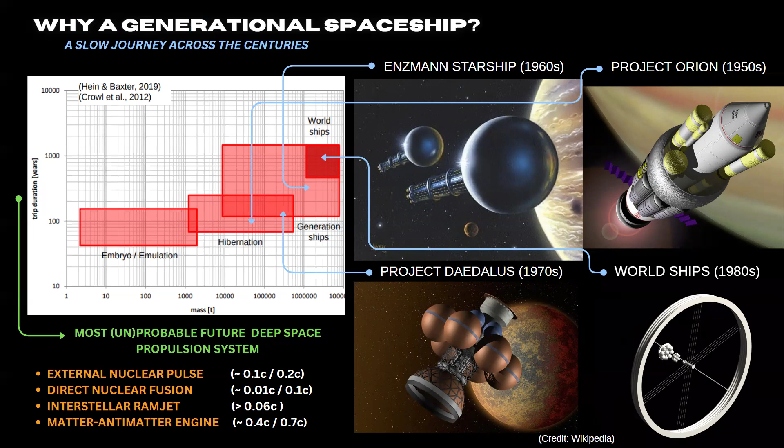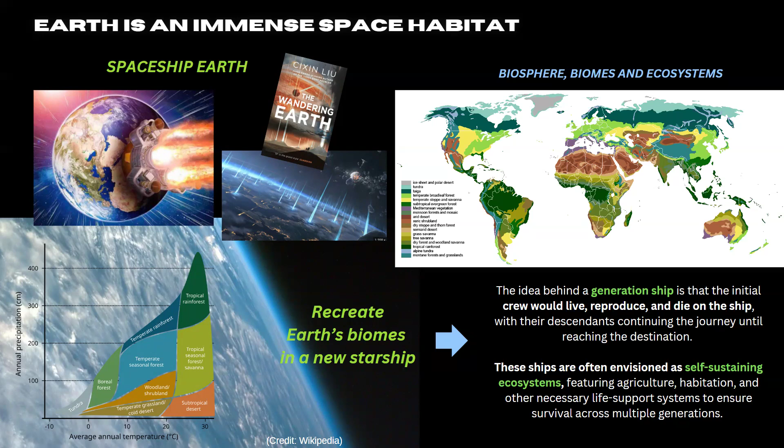The main idea is that we have to reproduce a second biosphere, like the one on Earth, a self-sustaining ecosystem that includes not only agriculture for food production, but also all the biomes of Earth's biosphere, in order to keep the ecosystem balanced and create this heritage of Earth's biosphere that will settle a new stellar system.

These objectives have already been achieved by Biosphere 2, a research facility based in Arizona, during the 80s, that recreated a closed artificial self-sustaining ecosystem for a small crew of 8 people.

But the real challenge is also to recreate a technosphere. What do I mean? Recreate a complete circular life cycle for all the resources, materials, equipment, and machines that have to be brought on the spaceship, because the spaceship will set out for a century-long voyage, and everything has to be packed, with nobody providing any kind of refurbishment to the spaceship. So everything has to be completely closed-loop and stocked in advance.

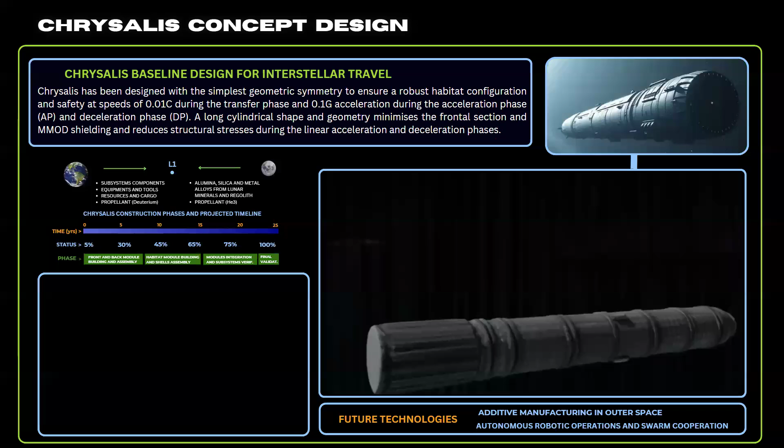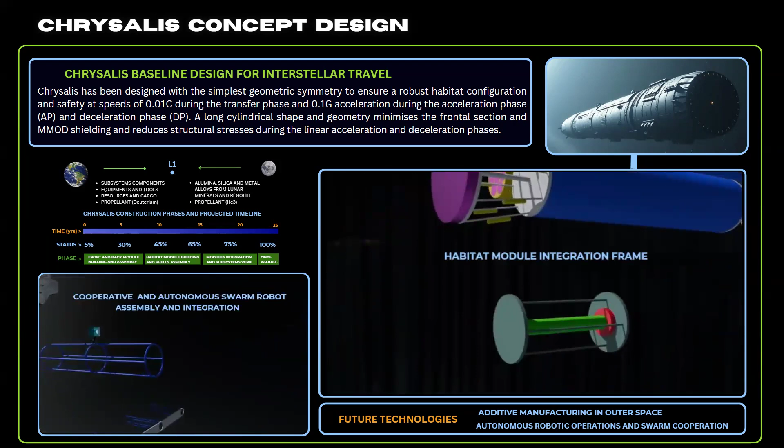This is the concept design of our spaceship, named Chrysalis. Basically, it's a very long cylinder of different modules that will be built at the Lagrange point L1 between Earth and Moon, just to exploit the resources and equipment from Earth, but also the resources from the Moon, because the Moon's regolith is rich in helium-3, which can be used as a propellant for the direct nuclear fusion propulsion system.

This is the configuration of our spaceship and its different mission phases. Basically, there is an acceleration module, a back module for the acceleration phase, and a front module for the deceleration phase.

During all the voyage, the inhabitants will be hosted in the habitat module, which is the small green rectangle. So most of the bulk mass of the spaceship will be just propellant, and the total mass will be around 2 billion tons for a length of about 58 kilometers.

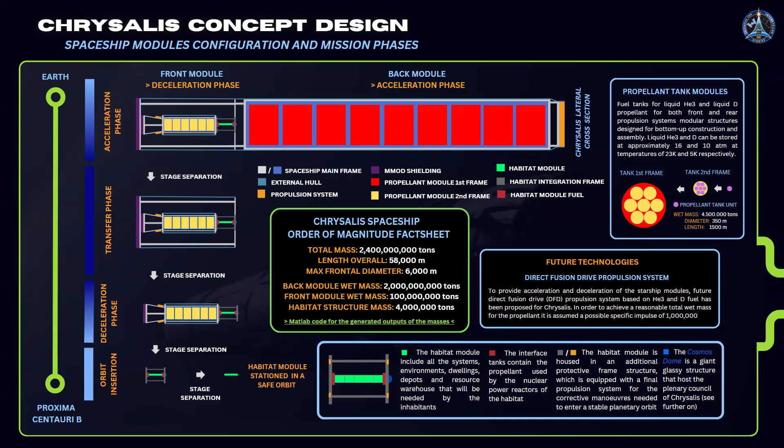If compared with science fiction literature spaceships, this Chrysalis spaceship belongs to the huge category of spaceships.

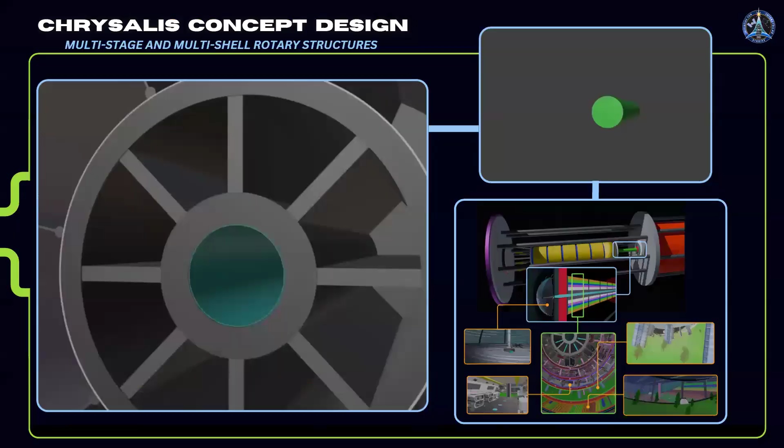What I want to highlight here is that in science-based spaceships, not science fiction, the habitat is a very small part of the entire spaceship, because the bulk of the volume is basically propellant for the acceleration of the long voyage. The habitat module is composed of 5 stages of different subshells, all nested inside and rotating at different RPM in order to provide 1g of gravity for the habitat environment.

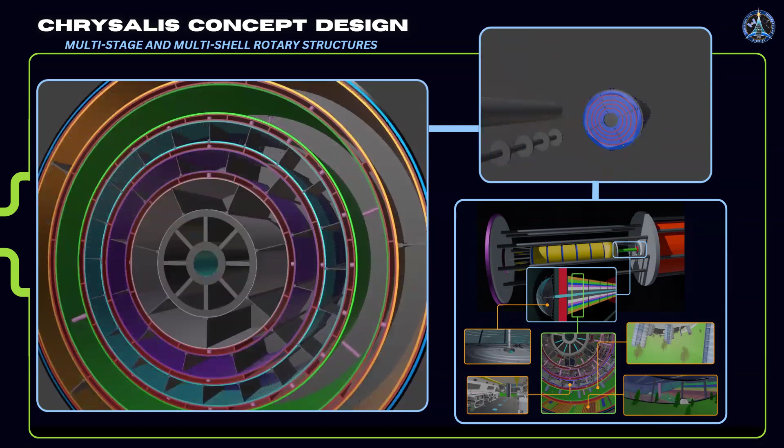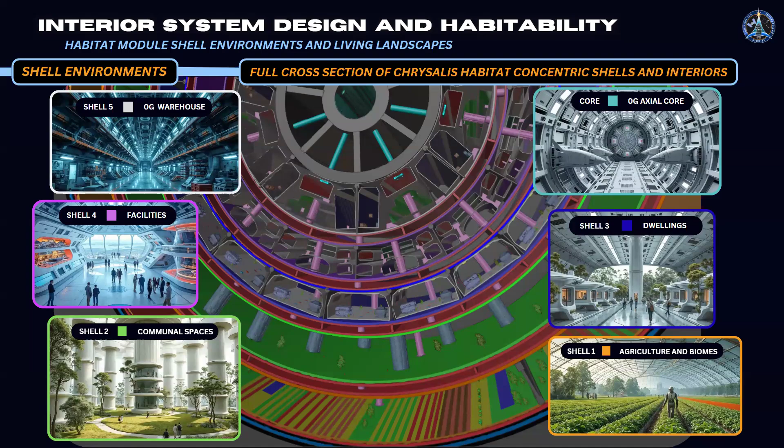Each shell hosts a precise habitat environment featuring agriculture and biomes, communal spaces for the population, dwelling areas, industrial facilities, and a zero gravity warehouse that functions as a depot for all materials and resources, plus a central access core that links all the stages and is also used to exit the habitat module during in-orbit insertion into a new planetary system.

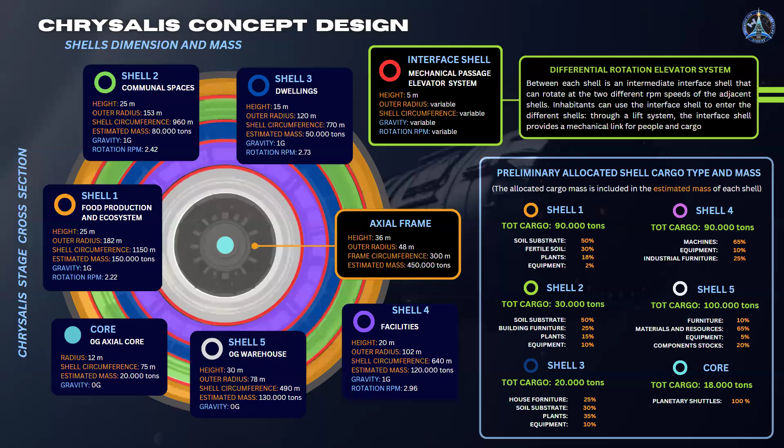The first shell is the agriculture and biome shell, which includes different biomes from Earth, like tropical forest, boreal forest, wetlands, and dry scrub, in order to preserve the heritage biodiversity of the biosphere. Each biome will be confined and insulated from the others in order to provide specific light, temperature, and humidity.

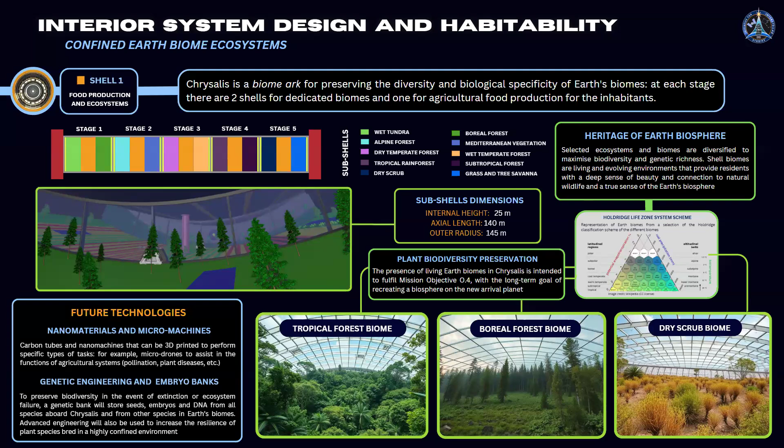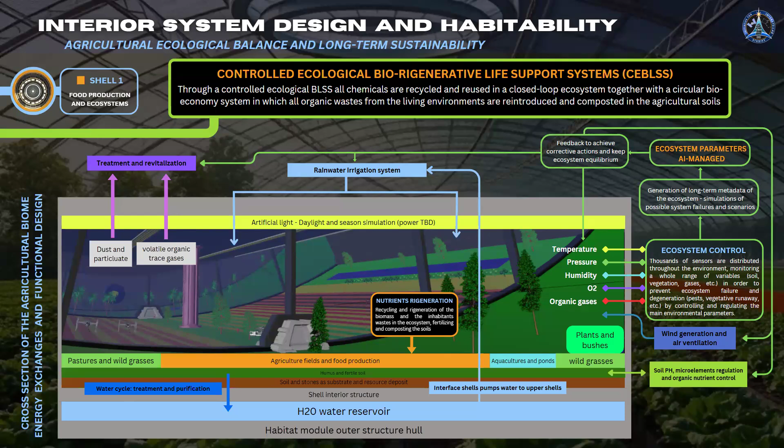The big challenge is to create a controlled ecological bioregenerative life support system, because we need to create oxygen, recycle carbon dioxide and all the other chemicals, regenerate the water, and also recycle organic wastes for the soils in order to keep fertility and generate food. It's a well-balanced closed loop ecosystem that has to be included to keep a long-term balance of the biology inside the spaceships.

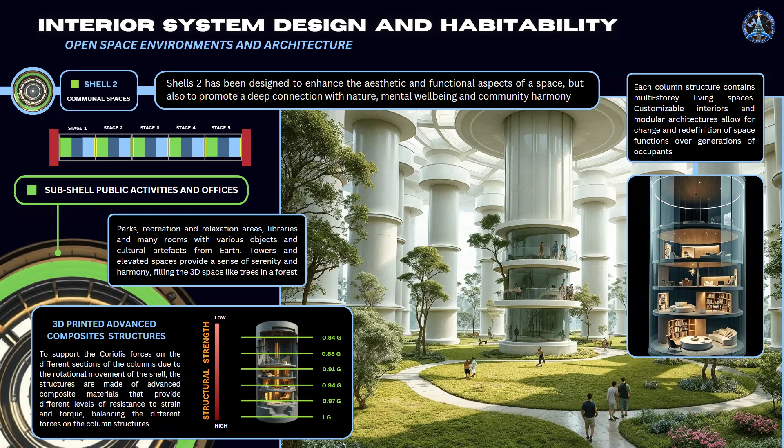There is the communal space shell, basically an open space environment structured with habitative columns where all the services like university, hospital, and so on are included. It's interesting how the perspective of a person inside these shells is not a plain horizon - because we're inside a cylindrical structure, the environment will be quite curved and the perception a little weird. All structures inside will be customizable and 3D printed through advanced printing materials.

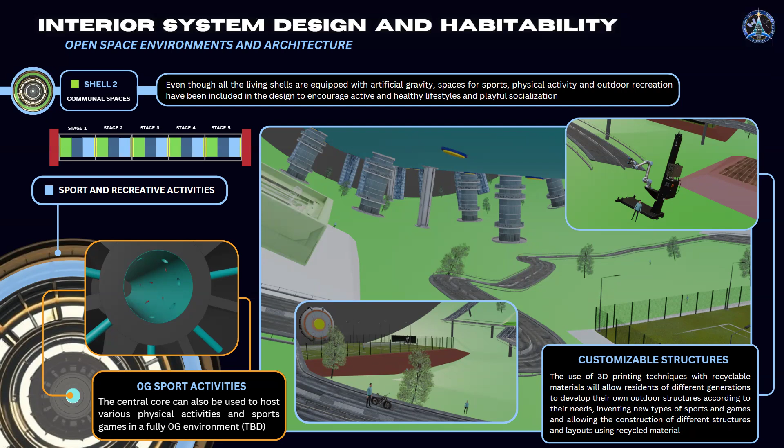We have a dwelling area where all the houses for individuals will be hosted in order to have private spaces, divided into different sectors, separated by parks and gardens to provide a relaxing and natural environment. The houses and interiors will be built with advanced composite materials and multi-layer insulation for secondary structures.

A very important shell is the industrial facility shell, which will include all the machinery assemblers, chemical plants, metal industry, engineering and physics labs, in order to create components for building and maintenance, electronics and robotics. This is the real challenge for spaceships - the so-called technosphere that has to be thought in advance in order to be self-sustaining for a long time.

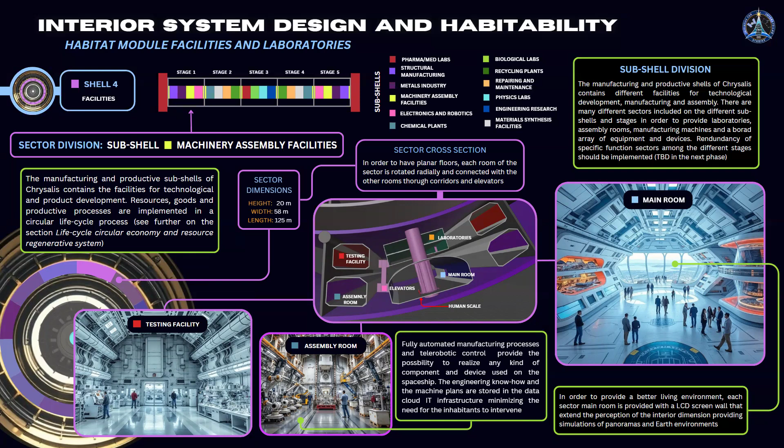And lastly, there is the warehouse, the big depot of the spaceship. It functions as a big reservoir for all the materials and resources, everything that has to be stocked for use during the voyage.

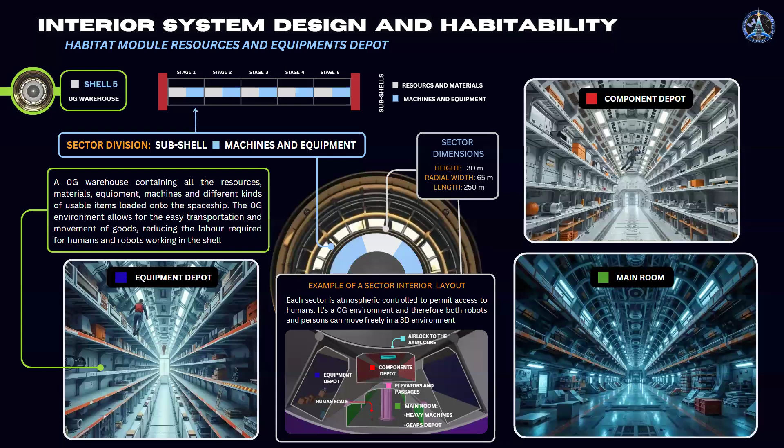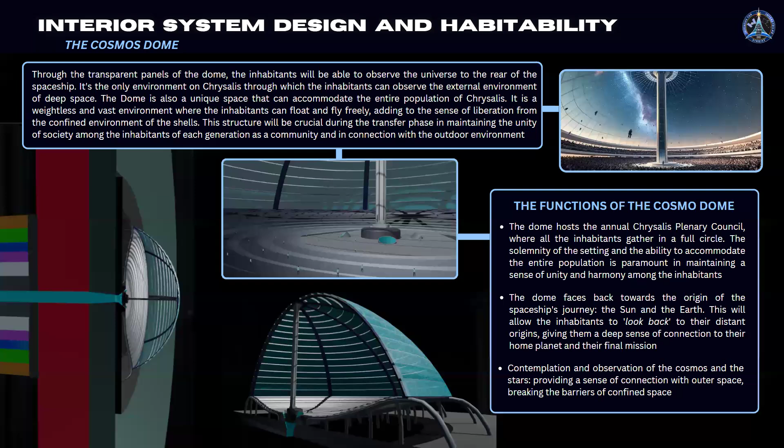Finally, there is the Cosmos Dome, an architectural feature we inserted in the final part of the design. It's a big cupola that will host the whole chrysalis population and will function as a structure giving a sense of unity and communality among all individuals. The cupola will also be composed of transparent panels through which people can look outside to the cosmos, giving a sense of community and unity with the cosmos, because the rest of the spaceship will be a closed ecosystem where it's not possible to look outside.

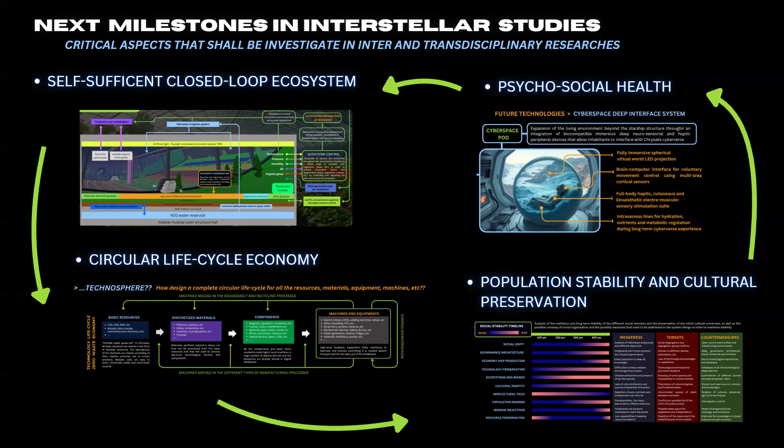Concluding, interstellar studies are quite a broad area of research that includes not only engineering, technical aspects, and physical exploration of the propulsion system, but also a lot of inter- and transdisciplinary research, because it's only holistically that all the different elements can be connected to recreate the complexity of Earth's biosphere. In the future, if humanity faces the challenge of migration toward another solar system, it won't be only about the propulsion system, but also about how to recreate a whole complex biosphere, social structure, and circular economy, balancing biological systems inside this kind of small-size Earth.